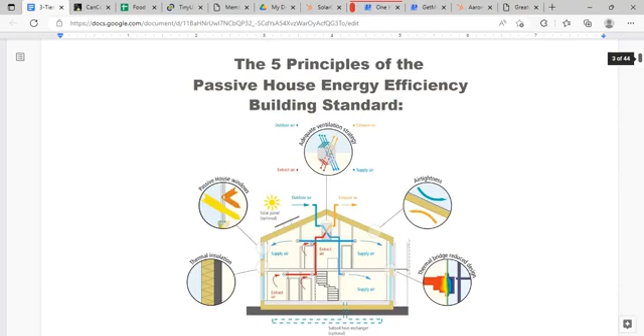Okay, I am a future certified passive house consultant. That is the world's most stringent or strict energy efficiency building standard out of Germany, and that's voluntary. These are the 5 principles of the passive house building energy standard. And I hope to make this a household name in American minds because it's still not top of mind, and people need to know about it because it is able to reduce a building's total energy usage by up to 90%, that's 90, without a single solar panel or wind turbine, at least for new construction in cold climates.

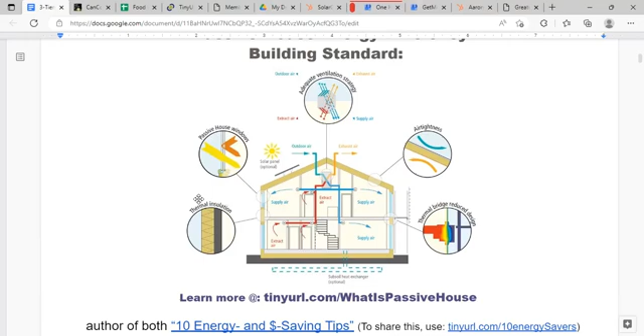Okay, warning, this is going to be a jam-packed, fast-paced presentation.

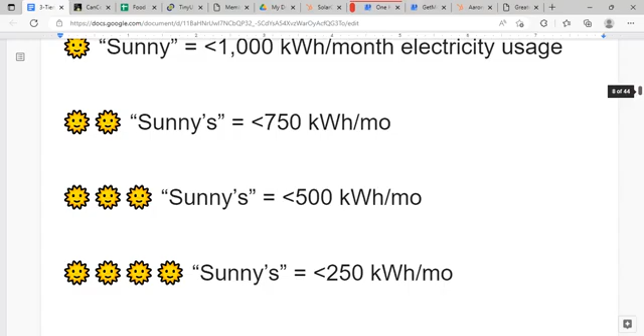One Sunny is if you use less than 1,000 kilowatt hours per month. That might be tough if you're in a large single family residential building, but not so tough if you're just a renter. You get more Sunny ratings if you use less and less kilowatt hours per month. Less than 100 is really tough—you've got to be sleeping naked or something.

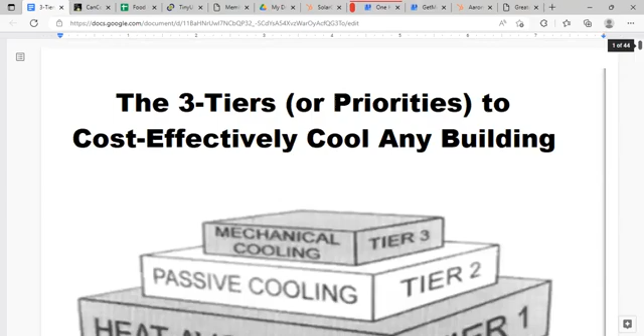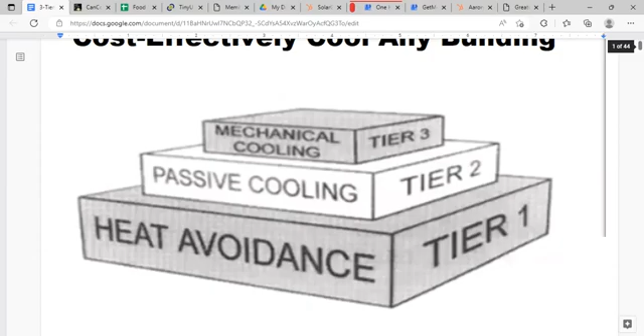As shown in this image at the top, these are the 3 priorities to cost effectively cool any building. You always want to focus your time, money, and energy on heat avoidance first—that's tier 1. Then you want to take advantage of or max out on passive cooling. Lastly is mechanical cooling that requires energy inputs. That's how you prioritize.

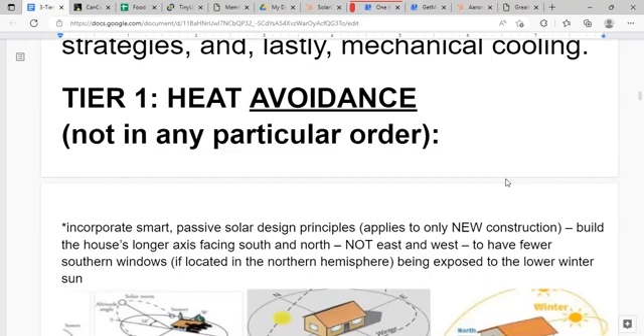So we'll start with tier 1, heat avoidance, not necessarily in any particular order. The most important—although you can't really do anything about it if the building is already constructed—is the orientation of your structure.

You want to incorporate smart passive solar design. You want to build the house's longer axis facing north and south, not east and west, to have fewer windows exposed to the south if you're located in the northern hemisphere, due to the lower winter sun. You can watch a video on my Solar for Dummies YouTube channel that goes into this concept, passive solar design, in much more depth. But hopefully that gives you an idea.

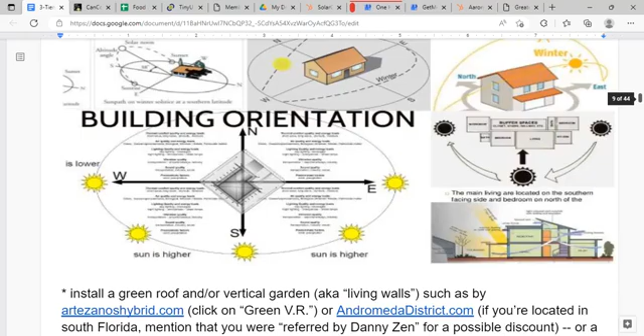Next, if you can, install a green roof and/or vertical garden, also known as living walls, such as these Florida-based examples. You can hopefully find someone around your area, not in the boonies, offering a similar service. If you visit either of these two companies, just mention you were referred by Danny Zen for a possible discount or at least a complimentary estimate or quote.

That's pretty cool—a green vegetative roof blocks off some of that heat, so you use less air conditioning and mechanical cooling.

If you own your house and are able to, you can install roof-mounted solar photovoltaic panels, since the sun's rays will strike the solar panels and not heat up your roof, so your air conditioning doesn't have to work so hard.

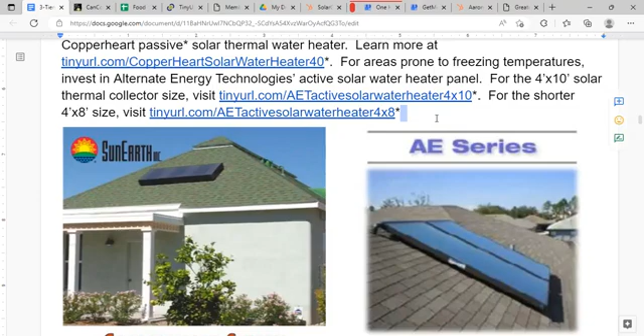That will further block the rays, and you'll be getting some quote-unquote free water after the initial investment. I'm not a super expert on this—I never sold one—but I know that tens of thousands of them have been installed throughout the last 5 decades in our country, at least.

Next, if you have a swimming pool, another way to block the sun's rays from striking your roof is to consider installing strips of solar thermal pool heating collectors that look like this. That may heat up the surface of the roof somewhat, but at least it's hitting that strip instead of the actual roof tiles.

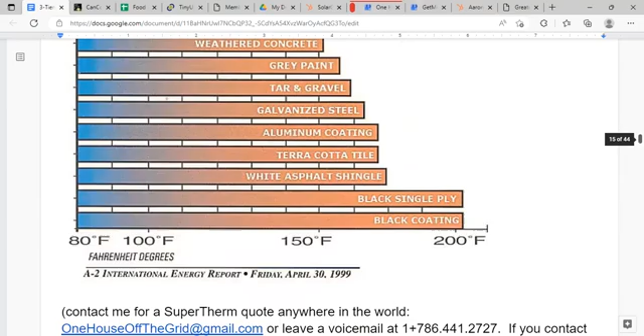It shows just how amazing Supertherm is at blocking heat, preventing heat loading in the first place compared to these other materials and coatings. You can contact me for a Supertherm quote, or if you speak to Superior Products International in Kansas directly, tell their sales rep Timothy Capel that you're referred by Danny Zen for a possible discount.

Next, if you're not getting your roof coated with either Sunshield or Supertherm, you can consider installing radiant barriers if you happen to have an attic. That's the kind of foil product—I'm not a super expert on that, but radiant barriers are pretty widely available, generally through contractors that could do that.

Next, to limit solar heat gain through your windows, which is the weakest thermal link in a building, by the way—sorry, I don't have this new link available yet, but I will. You can log into your Gmail in the future for this.